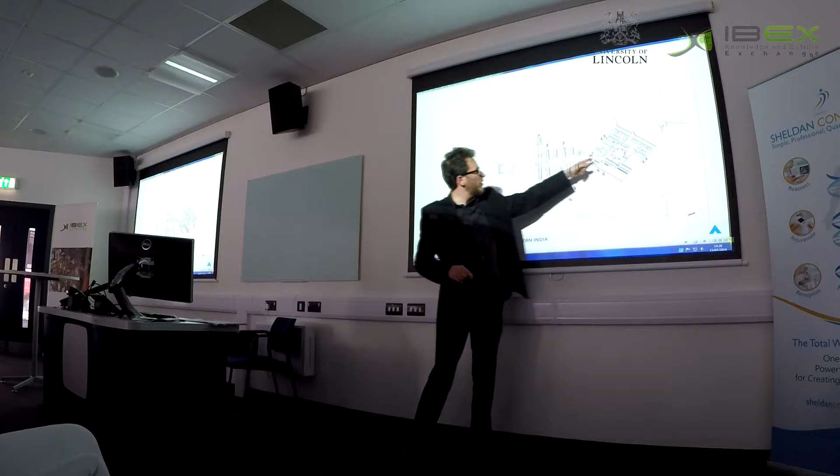The figure that you see there, on which the plan is based, uses the figure of a mandala, a 9-grid square, and then we have a central courtyard here, and this is the residential spine, off which the residences are located, in the dining hall.

So all the buildings are entered off courtyard spaces with shading through trees, and we also have PV arrays that provide sustainable power.

The courtyards themselves are articulated in order to create a spatial sense, which is determined by the children themselves, so it's less forbidding, because you're looking at actually a great expanse of desert with the mountains. So we're trying to reduce the scale to something which is much more child friendly.

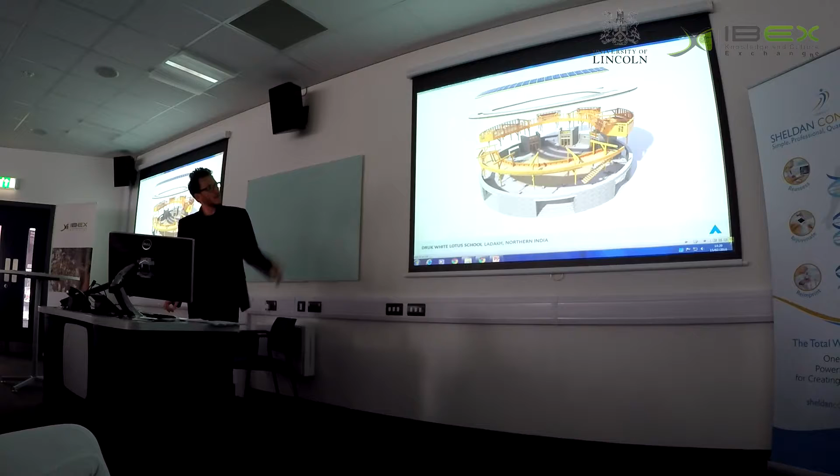And that's the opening back in 2001, and children. This is yet to come - this is the library that we're designing in the centre of the school.

Moving to Saudi Arabia. This is designed as a mosque as part of the KASC complex, and this is creating a forecourt to the sports centre itself, but it also allows for prayer to take place outside as well as within the mosque itself.

What we were interested in here was to reinterpret local tradition, both in terms of form and materiality. So whilst the roof has some kind of relationship to mosque domes, it is clearly of today, it's contemporary.

It's formed by a series of cylindrical forms that come together, and we have a tiled surface to the roof, and precast concrete elements creating this arcade. And you can also see the minaret there.

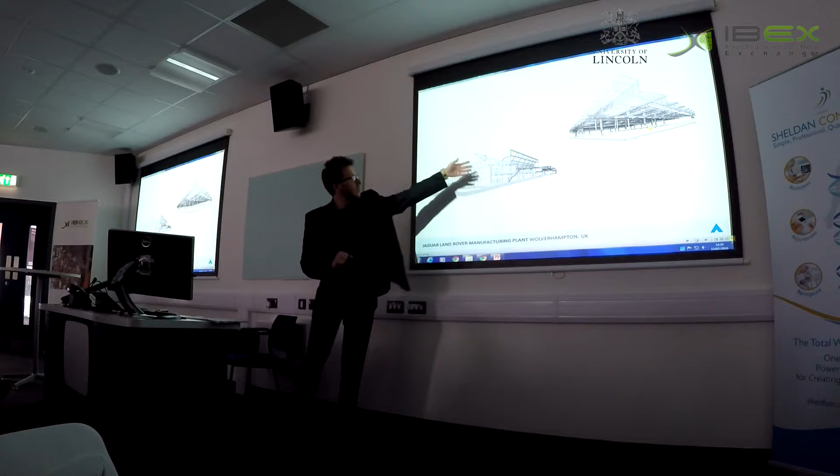So that's a view inside the machine room, which is creating the engines, and some of the Revit call-outs. So with the north lights, and this is the office component, which can be naturally ventilated. It's one of the finished shots, and there we are.

Sports. So Singapore Sports Hub. This is a 55,000 seat stadium, which can be used for a number of different sports. It's a sports venue, not only sports, also for concerts, and it is the largest free-spanning dome structure in the world, 310 meters.

And the key thing in the design here was to look at the design of these elements, the opening roof. By coming up with a design for the pulley system, we were able to keep that load down greatly. As a consequence, the load of the whole dome is kept to a minimum, and the steelwork used is a fraction of that used, for instance, for the Bird's Nest.

Another key idea here was to do with cooling. So rather than cooling the entire volume, what we provide is cooling locally to the seats of the spectators and also for the pitch. By doing that, and working closely with the regulatory system in Singapore and actually questioning that, it's much more efficient and much more environmentally sound.

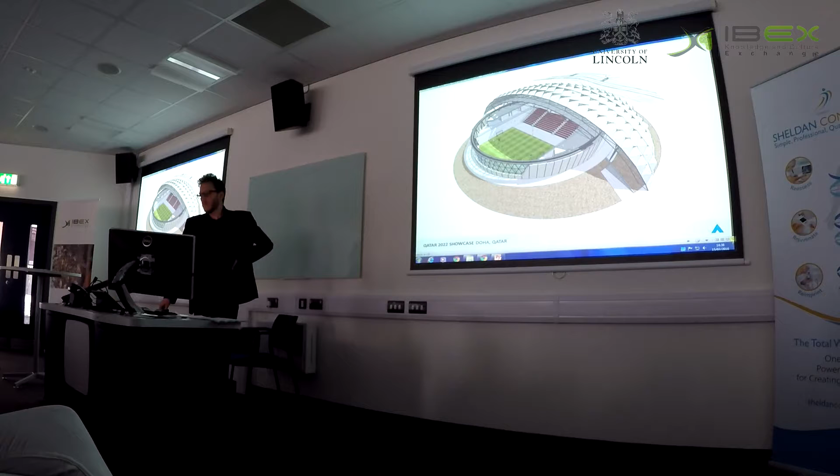This is a very small sort of mini stadium which we did for Doha to help them win the Football World Cup. This is the first ever carbon neutral stadium in the world. Although it's a tiny one, it created basically the precedent on which all the stadiums are being built in Doha currently. You can see the shading structure for the roof, which is retractable.

And here you can see these solar collectors. These solar collectors basically transfer the solar energy into cooling. So when the roof is closed, you cool the space entirely through the sun's energy, and then the PVs provide energy for power.

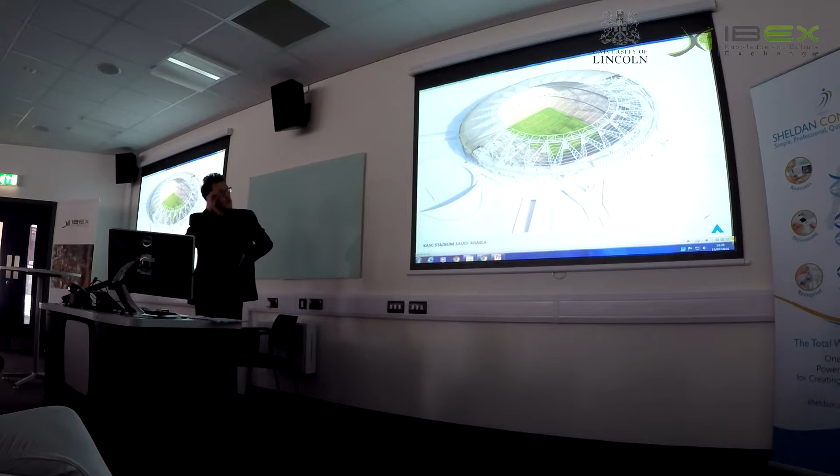KASC Stadium, so back to Saudi again. That's just an image of the structure, as you can see there. So once again we're looking at how we could create a shading structure which had a relationship to the history of Arabic art and architecture, creating this route around the stadium which allowed for a comfortable temperature, but actually outdoors.

It's a naturally ventilated stadium. There's a picture of the interior. And that actually seats 60,000.

This is one we're working on at the moment in Qatar, which is a tennis centre primarily. It has retractable seating, so it can be used as a venue for a number of different things, but that is relatively tight. It's a 15,000 seat stadium, and again we have this lid that closes over the central oculus.

One of the key ideas here was to actually expose and celebrate the bowl, so you can clearly see the bowl of the stadium articulated in relation to the front of house venue entrance area, and it also creates this unique plaza here, which will be a public square. This is meeting the local Qatari equivalent of BREEAM, sorry, I can't remember the name of it. So that's some details of the roof.

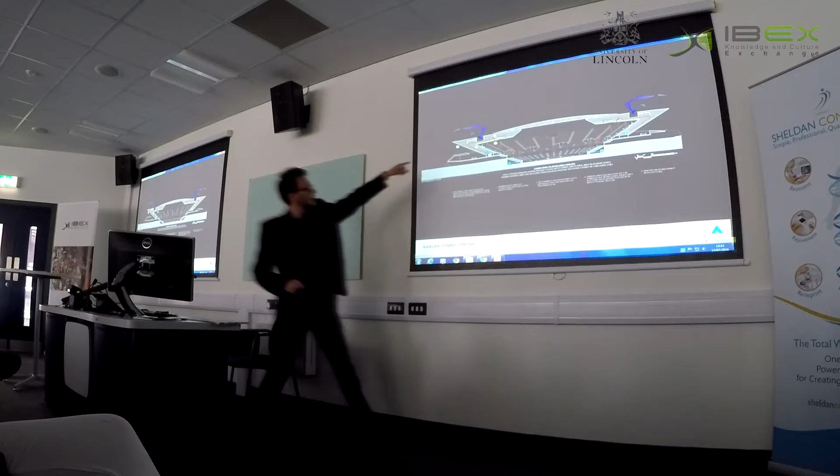So this is in nat vent mode, with the roof open. You can see the air is circulating through and out through the roof. Then when the roof closes, we bring in cooled air local to the seats, which is then extracted into the roof space, and there's a heat transfer system so that the energy is efficiently recycled. That's a view of the interior.

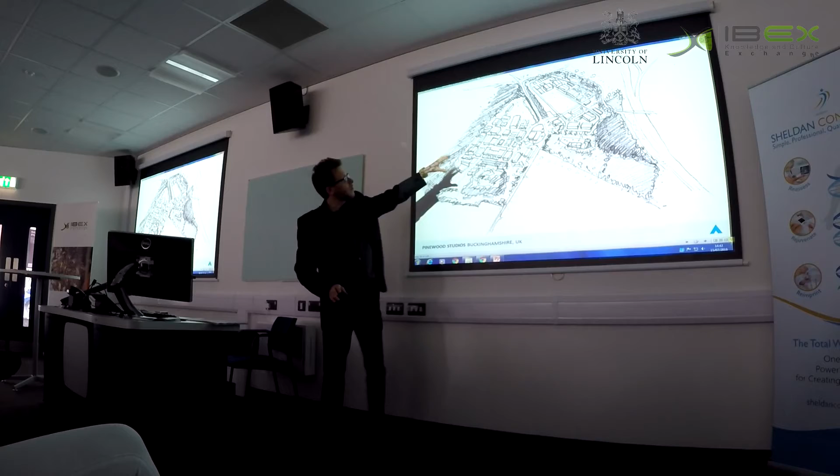So onto commercial. This has just received practical completion. This is the existing campus for Pinewood, and then there's a new series of studios, where they basically film a lot of the blockbuster movies, such as 007 and so on.

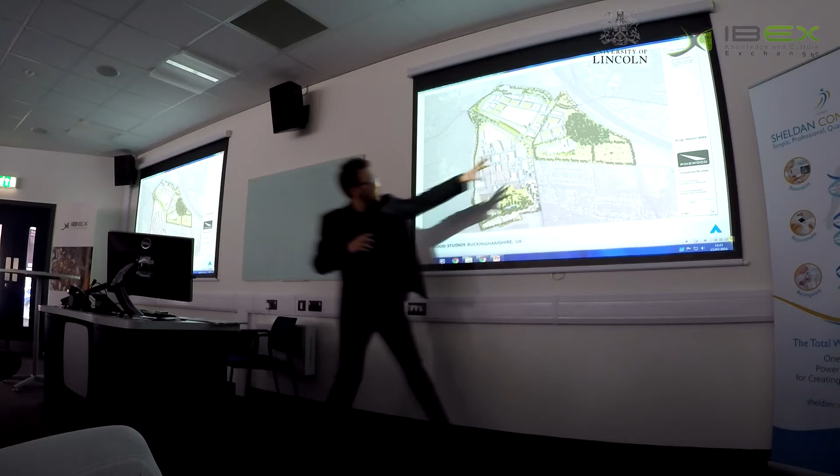This was actually quite a controversial planning proposal, given the fact it's in the green belt. We achieved planning permission by coming up with a scheme which had no loss of biodiversity. The existing hedgerows and these green areas were all maintained but actually enhanced with a greater mix of planting. Also, the majority of the roofs have biodiverse roofs on them, which I think is unique for a film studio. These are very large steel structures.

The other key component is obviously acoustics. So they are formed with the base having precast panels, and then above that there's a timber cassette system which is perforated internally, so that the mineral wool offers its performance in acoustic absorption, both in the wall plane and in the roof. That's a key requirement, but it's how we bring those things together in a very efficient way, so that a number of things are doing multiple jobs at the same time.

This is a naturally ventilated office building for Arup itself, our office in the Midlands. Here we're creating a series of pavilions which are 24 metres in depth, so they're quite deep for cross ventilation.

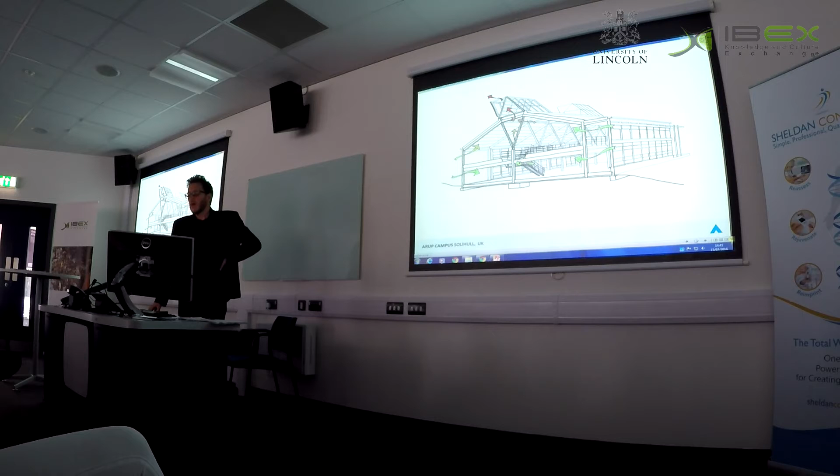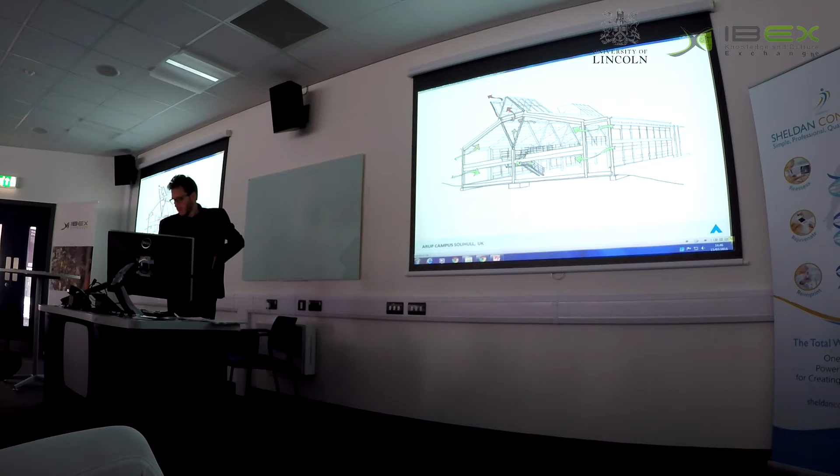The design is also based around economy of means. So the steelwork is exposed, the concrete soffits are exposed, and keeping it cool is key to the design. Minimal materials used, but that obviously requires quite a lot of thought and coordination.

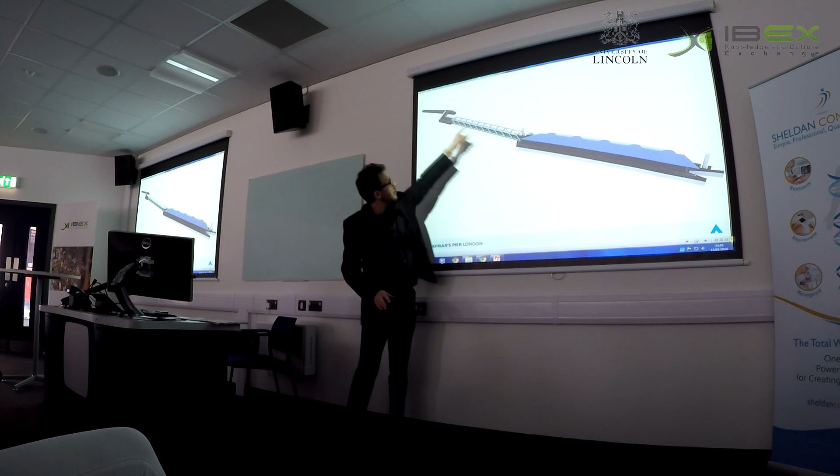Blackfriars Pier. Here we've got the North Bank, and there's this armature that brings you across to this kind of pontoon where the boats land. I don't know how many of you have travelled up and down the Thames, but there's not really that much architectural significance actually on the Thames itself at the moment.

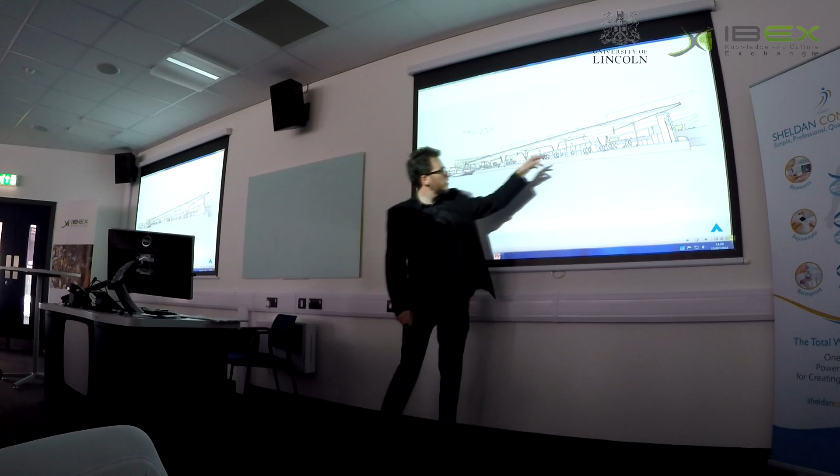So we're trying to really improve that whole situation and have something of refinement. This roof creates a really beautiful sail, with integrated lighting, and a glazed area here as a waiting area. Celebrating...